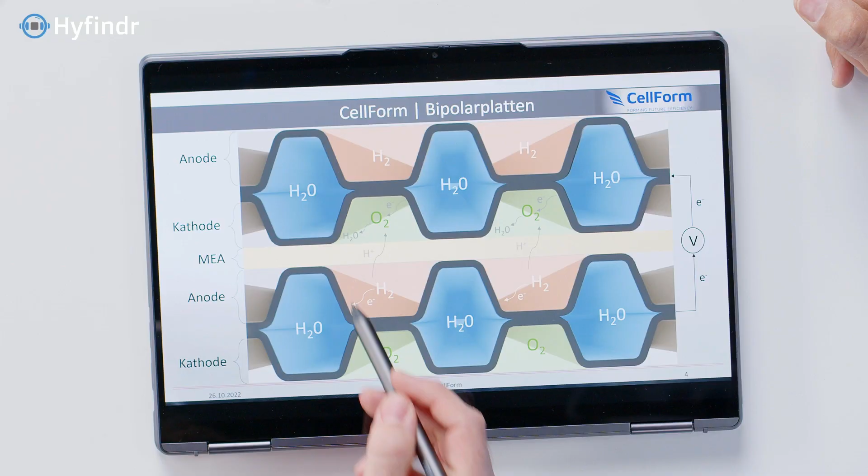And what happens now is hydrogen wants to react with oxygen to liquid water. And this liquid water then needs to be removed by the bipolar plate on the cathode side. And the idea behind the fuel cell and the bipolar plate is that the MEA between the 2 plates is only permeable for protons, H+ protons. So the hydrogen gives one of its electrons to the anode side, goes through the MEA, takes an electron from the other side and reacts with oxygen to water.

And these electrons are then transferred from the bipolar plate through an electrical engine, which powers, for example, the car, and then the electron is transferred to the cathode side. So that is the idea behind the fuel cell.

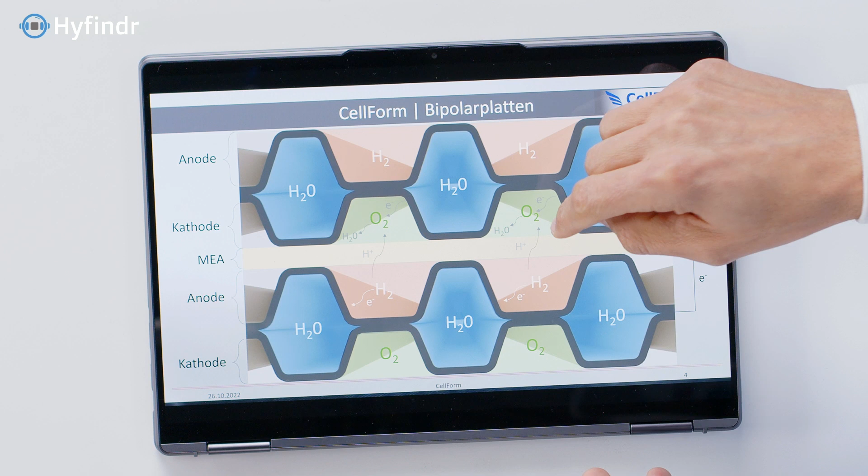So what we see, this metal plate essentially is giving space for the coolant to come through, and also holding the MEA in place, providing channels for hydrogen on the one side and channels for air with oxygen on the other side, and taking out the water vapor or whatever comes out of that, and also taking out the electricity.

So the electricity flows through here. That's correct. Yeah, correct. So it needs to be electrically conductive. Way to go. Okay, wow. So I know you build these things also for meaningful companies in this area. So what do they care about when you do this?

Oh, they care about a lot, of course. So first of all, quality, because we're talking about very, very tiny geometries in that case. So the foils are 50 microns, sometimes 75 microns. So here we have actually 50 microns welded together, and in that case it's 75 microns. So the thickness itself and all the quality deviation, etc., is very demanding. So that is the first thing they care about.

And of course, in terms of the functionality itself, the bipolar plate plays a very crucial role when it comes to price and efficiency inside a fuel cell. So a lot of the price you're paying when you buy, for example, a Hyundai Nexo on the market is actually represented by the bipolar plate itself, because it's needed 350 times in that car. The price itself is mainly determined by the product.

Okay, so that means you are one of the people determining the prices in our industry. Yes. And we are obviously trying to reduce that. So most of the customers care about the price, of course. This is one main disadvantage of hydrogen overall, price. So if you compare it to battery electric vehicles, for example, you need to reduce the price to the lowest possible in order to enable hydrogen overall.

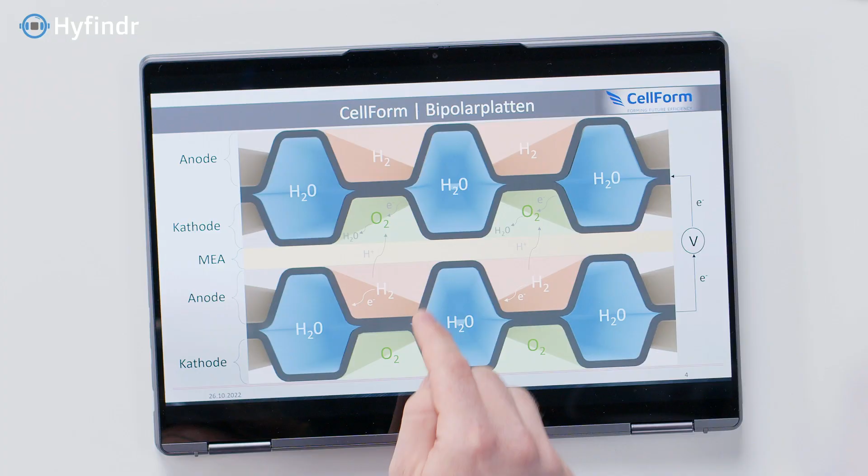Okay, obviously price comes through efficiency and making production. Can you take us a little bit into how you get that efficiency? What do you do to make it more efficient? The efficiency is actually the second part I care about the most, because efficiency is also mainly determined by the bipolar plate itself. Not only by the bipolar plate, but it has a huge impact. So how you form those channels, not only the accuracy, but also the engineering behind that strategy plays a very crucial role in terms of the efficiency of a fuel cell.

And efficiency itself, only to highlight that point, is also the second main disadvantage of hydrogen, because you need to transform electrical energy to hydrogen. That is called electrolysis in a green world. And that green hydrogen then needs to be transformed back to electrical energy in the fuel cell. And both transformations, electricity to hydrogen and back to electricity, come hand in hand with energy loss.

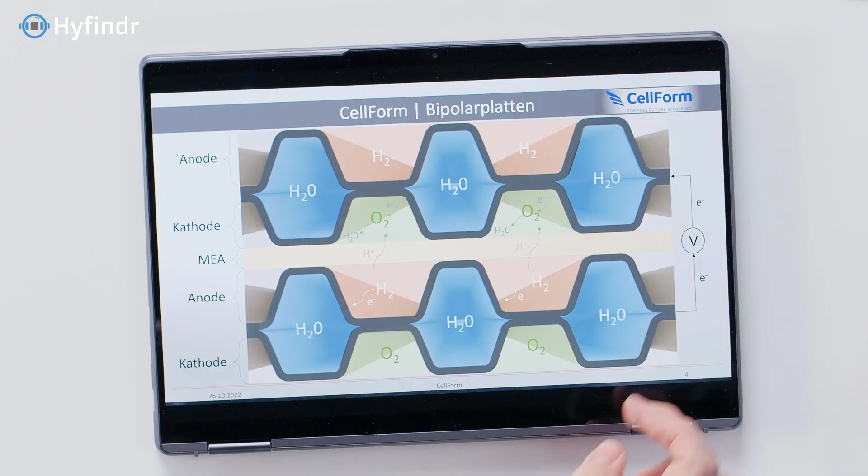Can you show us more about that? I know you brought some information, like how you manufacture, how you get those things formed and so on? How we get those formed. We are starting with a thin substrate material when we talk about the manufacturing approach. And this could be stainless steel, it could be titanium, nickel-based alloys, you name it. So everything in the metal area. So there are many ideas on the market.

And then we go into the forming. The formed half plates are then welded together, and this is in the end the final bipolar plate. We always need a coating on the bipolar plate, because the conditions inside the fuel cell are very rough for the metal. And after the coating, or sometimes before the coating, we make a leak test, because of course any leak needs to be determined before you stack it. And then the final stack will be set up.

So essentially you take a flat metal and then you... Correct. I don't know the words, punch, form. There are many forming approaches on the market. So conventional stamping, hydroforming, roll forming, all those forming strategies have advantages and disadvantages. And then you have to weld them. Why do you have to weld them? Because you need to represent the coolant channel between the plates. Because you need to stick those two together, like we saw on the other picture.

All right, okay. And what is it that you coat them with? What do you put on them? Mostly it's PVD coating or carbon-based coating. So the coating itself needs to reduce the electrical contact resistance on top of the plate to an absolute minimum. And also, the corrosion resistance is a huge topic. So no metallic ions, they will destroy the MEA, of course. When I look at this, this is very thin.

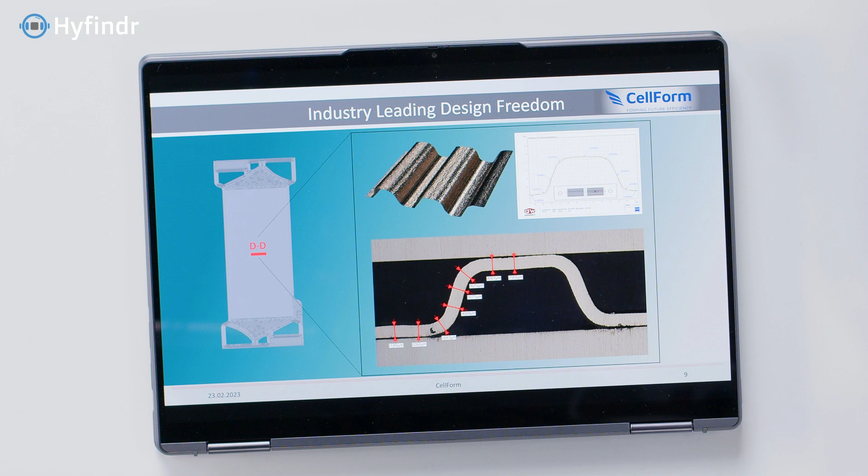So, I mean, doesn't this break when you try to form a channel, all these things? Yeah, that is actually the main task for us, because we're talking about very thin substrate sheets, the thinner the better. So 50 microns is more welcomed by the customer than 75 microns. And the thinner you get, the harder it is to form.

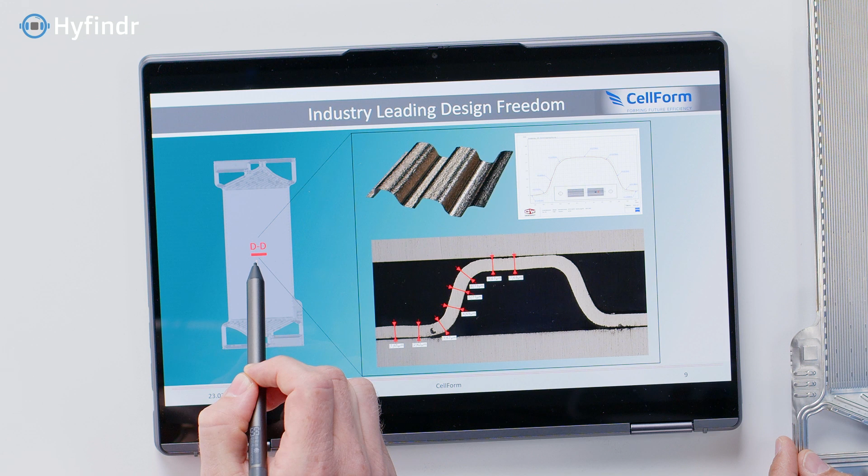Here we can actually see on that slide also some quality assurance we are doing on this plate on the table. So we have a cross-sectioning in that red area. And here you can see the thinning. And our task, of course, is to make the thinning very, very even. So you need to be able to evenly distribute the material throughout the flow field. That is what the active area means on the bipolar plate. That is called the flow field.

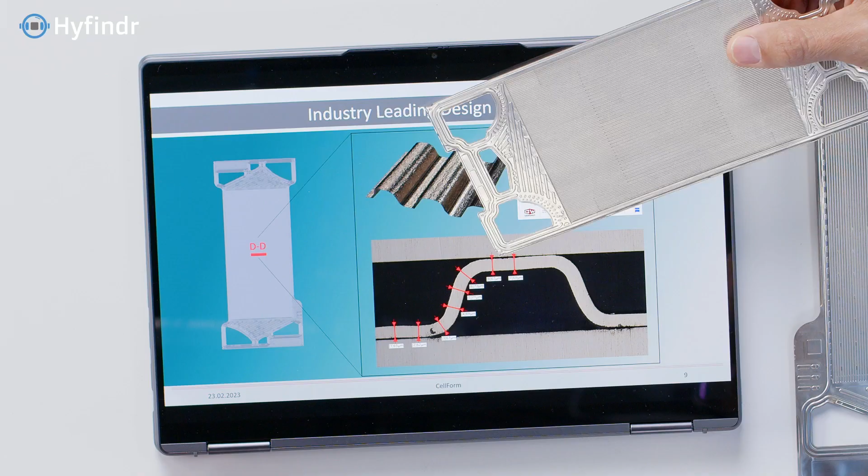And the efficiency, just to take up that thought, the efficiency increase is determined by how much flat area you have on top of it, how accurate the channels are, because the electrical current also needs to run, of course, through the plate. And if you have a longer distance, if you have less contact area between the plates, the more energy loss is actually happening. So this top area would be the contact to the next? That top area in that case is actually the contact area to the MEA.

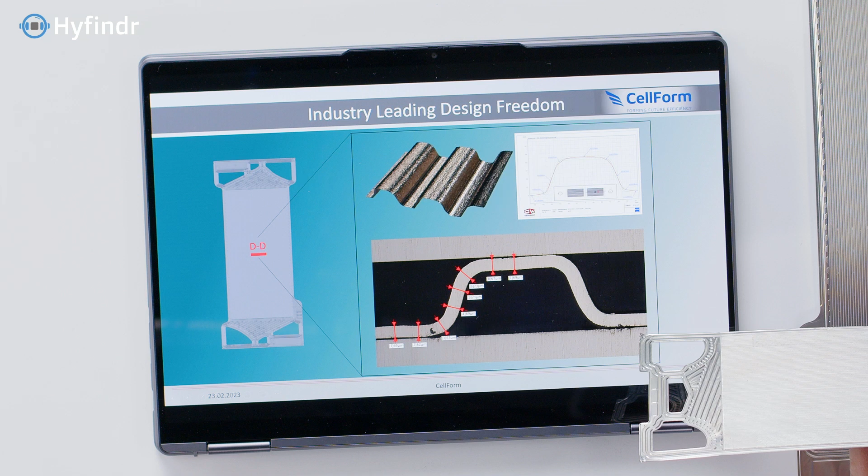To the MEA. So we have the GDL, then we have the membrane, another GDL, and then the next bipolar plate. And where would be the next bipolar plate? The next bipolar plate would be here, on this side. So we're only looking at a half channel here, to be honest. The next half plate would be there, and then welded together. And this is where you would do the welding? Correct. And how do you do the welding, if I may ask? Like you get in between there and weld?

Yes. So a common strategy is laser welding, of course. We can also look at some pictures here. First of all, of course, it's a very hard job to weld 50 microns times 50 microns together, because there is no material actually on the plate that you can use for any weld. The companies are actually doing that very, very well on the market. The task today is to be very process reliable, because the welding itself can destroy the plates. You can cause some defects on the plate. And you need to be able to do it very fast, because you want to reduce the price to a minimum, of course.

So looking at this diagram here, what do we see? I mean, I recognize the channels. We're only seeing a little bit of the plate, so only 2 channels. We're talking about 2 or 3 millimeters here. And the dots in the bottom of the channel are actually the laser welding dots. And that is some kind of 3D depth measuring we're doing here in order to look at the weld seam, at the weld dots, because you not only need to weld the plate around, because you need, of course, a leakage weld for the coolant channel. You also need some electrical contact welding in the flow field. That is also very, very crucial for the functionality of the plate, because a lot of energy needs to run through the plates.